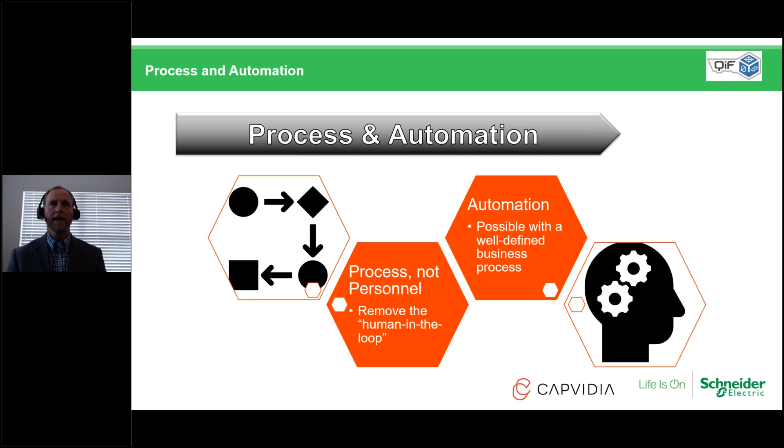And then once you have a more structured approach to your manufacturing processes or your business processes, then it becomes very easy to start automating certain tasks. And so that's a very big time saver, obviously. And so that's the flow from design down through measurement.

The second benefit that comes: a lot of the benefits in terms of process and automation are some of the things that you see first. But I think the bigger benefit is going to come in terms of data capture and using the data from your real parts and feeding that data back into design. If you think about metrology now, by and large, it's used to make pass and fail decisions. There's a lot of effort put into gathering data about the actual parts that are created.

And really, to a large extent, it's being wasted. And often for this reason, metrology or quality is not really viewed as a value-added activity in manufacturing. It's kind of a necessary evil that you have to spend some money on, but it's not viewed as something that provides value. But the future state with model-based definition is very different.

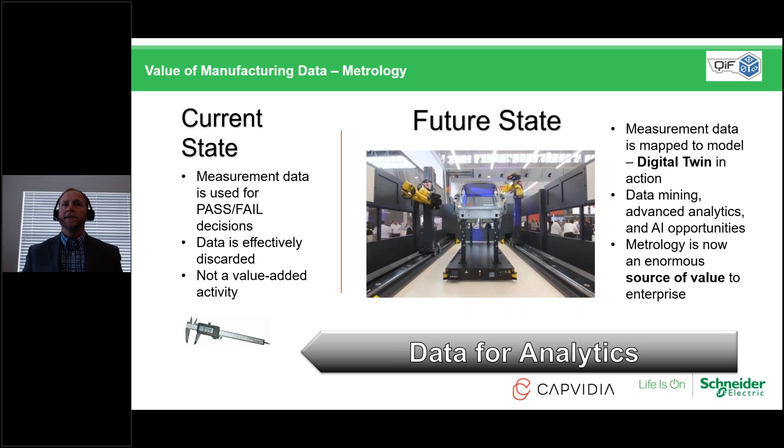We're capturing mountains and mountains of data related to our actual part. So let's use that data to add value to our enterprise. In reality, this is really what a lot of the talk about digital twin is. We have our design model, and then we have our actual models, and creating mappings between them. And in terms of the underpinnings of how you do that, a lot of it's with model-based definition. So those are kind of the streams that we see in terms of why model-based definition is important.

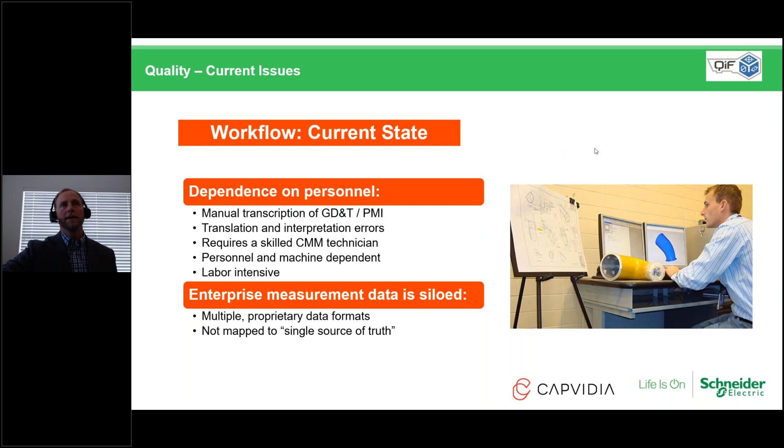And then on the other side, in terms of data collection, this can be a problem as well, because once you have somebody manually interpreting this drawing and entering it into the CMM software, you lose your chain of traceability back to your design model. So now your data is not mapped back to that single source of truth, which might be your NX model or your Creo model or your CATIA model or your SolidWorks model or whatever it might be. So that's kind of the state of quality-related MBD at this point. And this is what the MBD approach tries to fix and turn on its head.

First of all, it's just improvements in terms of the process. Transcription errors are eliminated because now we have PMI being imported by software and loaded directly instead of having to be interpreted by a person. The design knowledge that's encoded into your native model in the form of PMI is really encoded and then read by software, rather than something that we're dependent on different personnel to try to interpret.

So that means it's very repeatable. For the same PMI that you input, you get the same exact program every time. So that's a key thing right there for manufacturing. And then finally, it frees up a lot of time from these skilled metrology engineers to be doing things that are more value-added activities rather than just entering data from a 2D PDF.

And then finally, in terms of the availability of data, using QIF and using model-based definition allows you to maintain the link from your native model, your design authority model, to your QIF derivative and then through your QIF results. So you can keep that chain of traceability the whole way and keep a mapping: I have this PMI, this position annotation on my native model. I would like to know what all of the results are from all the measurements on all my various components for that specific position tolerance. Maintaining a mapping like that becomes possible, and that opens up a whole other world in terms of analytics.

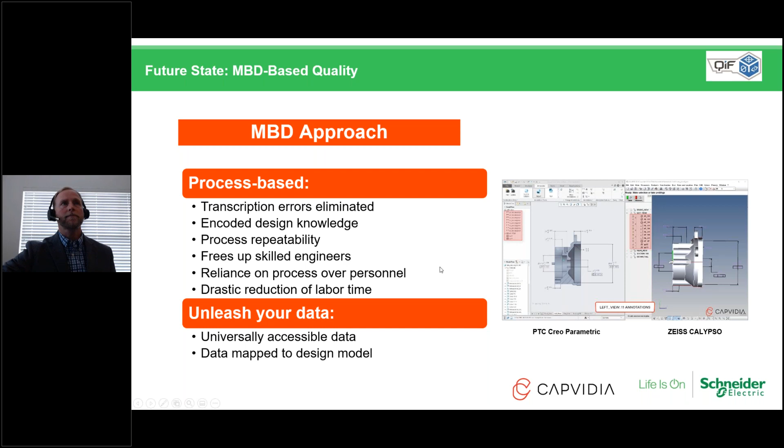So just to give a general idea of a very standard, high-level picture of a common workflow that a lot of users are using in terms of model-based definition right now using QIF, let's walk through these stages. We'll start off with our native CAD. In this image we're looking at a Creo Parametric model; maybe it'd be an NX model, an Inventor model, CATIA, and so forth.

So first, from this model we'd create a derivative model in the QIF format. And so now you have a QIF MBD model. This contains all your CAD data, all your semantic PMI, and it's in the ISO QIF format. So it's an international standard, easily understood and readable by third-party software.

From here, one of the big things that a lot of people are doing is carrying out this task called ballooning, often called ballooning or bubbling the part. Basically, at this stage we add characteristic IDs to each of the measurands that need to be measured on this particular part. And they can get listed out in a tabular form, like we see down here. This allows us to start to generate our control plan and determine what measurement devices will be used to measure and verify each of these characteristics on the model.

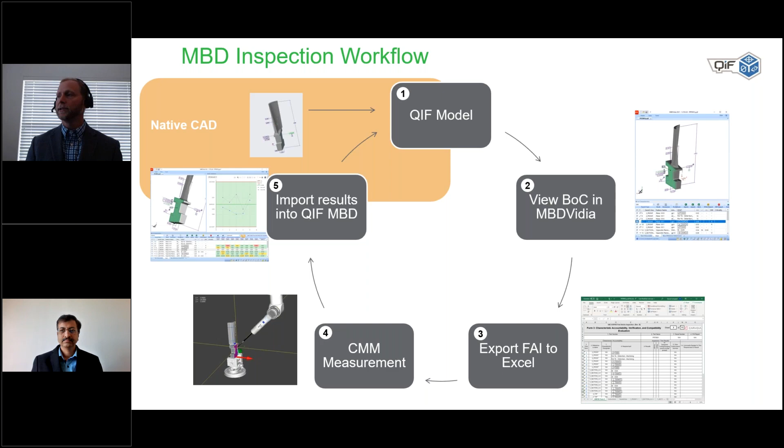And finally, once we're done, we can capture all of these results, whether they be from the Excel form or from a CMM measurement, and they would be exported to the QIF results format, which can be linked up and mapped back to the QIF model. So we would see here our blade model, and then a set of results coming in, some run charts and so forth. So that's a high-level summary of a QIF workflow using MBD. At this point, I'm going to pass it over to Narendra, and he'll give a more specific look at how Schneider is using QIF and has molded it to their workflows.

Okay, so thank you, Daniel, for that information. For the first part of what Daniel mentioned, I will give the Schneider perspective. So hello everyone, my name is Narendra Khadkar. I'm from Schneider Electric. So what is Schneider Electric? Let me go to the next slide.

Okay. So Schneider Electric is a technology company. We provide the solutions for automation, and we are in energy efficiency and sustainability. We provide solutions to different businesses, and if you see, we are in the market of buildings, data centers, industry, and infrastructure. So we have a strong commitment to innovation. So you can see the figures around.

We are a 25 billion company, and we have more than 128,000 employees across the globe. We have 4 key centers, that is North America, China, West Europe, and rest of the world. And we have mainly two businesses: industrial automation and energy management.

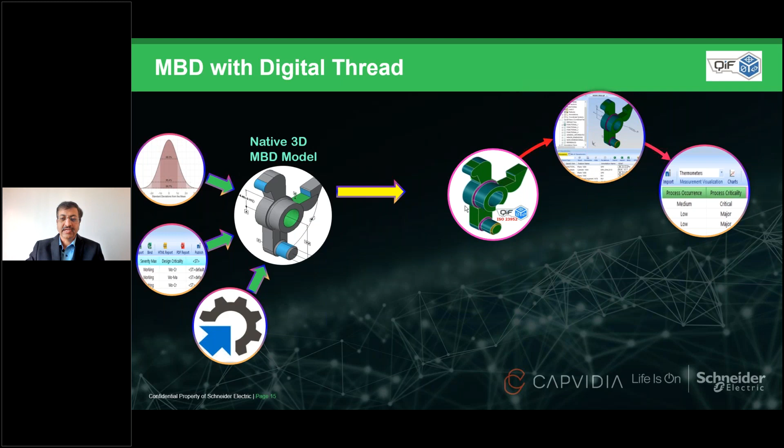the parts are manufactured. So in Schneider, maybe 5% of the parts are manufactured within Schneider, which are very key and confidential, but 95% of the parts are manufactured with our suppliers. So we need to onboard suppliers also. So whatever solution we try to bring up must be accepted by our suppliers, and they must play a key role on that.

So once the parts are manufactured, then, as Daniel was mentioning, we program the CMM offline program, or we can say the model-based CMM program, so that the parts measured at the supplier with the same program can be used at our facilities, so there is no confusion of selecting the points or the point cloud. So we have a consistency of measurement, and there is no ambiguity about what happens at the supplier's end or at Schneider's end. So there is a good consistency of the results.

And once the part is qualified, or if it's not good, then rework can be done at the supplier's place. And now, thanks to the 3D viewer that is available with the MBDVidia, we can see the result by just clicking on the key characteristics or the surface feature. Immediately the pop-up window or the results can be seen, like the thermometers, what are the real measurements, or we can see the process capability or process capability index, standard deviation, all the information is available. So this is the workflow that we customized that suits our robust design methodology.

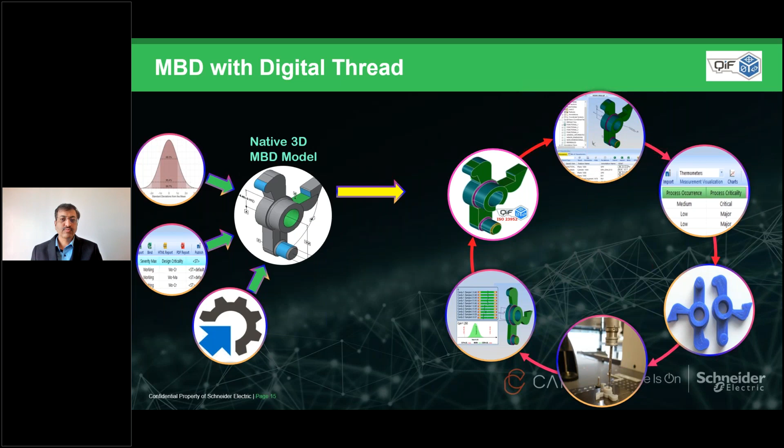So just moving forward, I have a quick demo to show you how the tool chain is seamlessly connected. So we start with model-based definition in Creo. Then you can see that the next phase for us is the CETOL. We use the 3D tolerance analysis tool, which has a direct link to Creo. So it's synchronized, and the bidirectional flow of the key characteristics can be pushed back to Creo also. So we maintain the digital thread along that. So if I just go quickly on to the video, it will be pretty fast. Okay, so this is what I just mentioned to you.

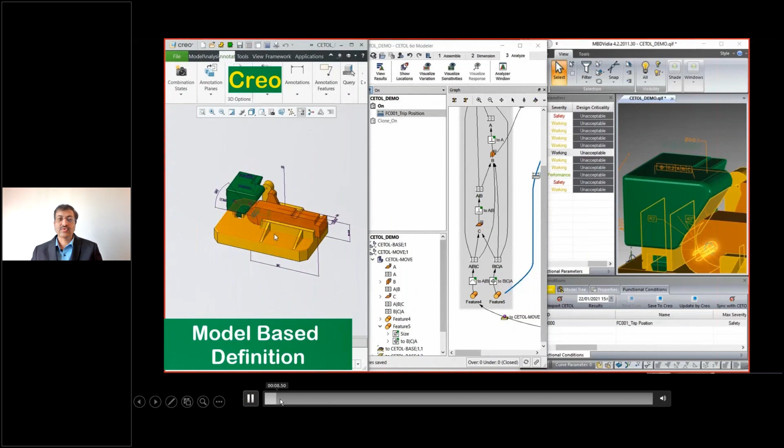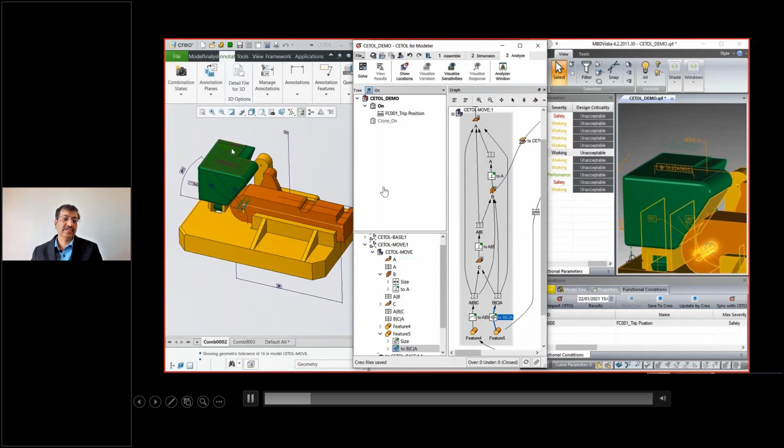Yeah, and then as I mentioned, we do the 3D tolerance analysis. So we get the information here, what are the optimized GD&T we need, and we can push all the information back into Creo, so that we can enrich the 3D native file. So apart from CETOL or the 3D tolerance analysis, we have developed an interface which manages the parameters. When we say parameters, it's all the key characteristics that define some kind of output for the product. We call it a functional condition.

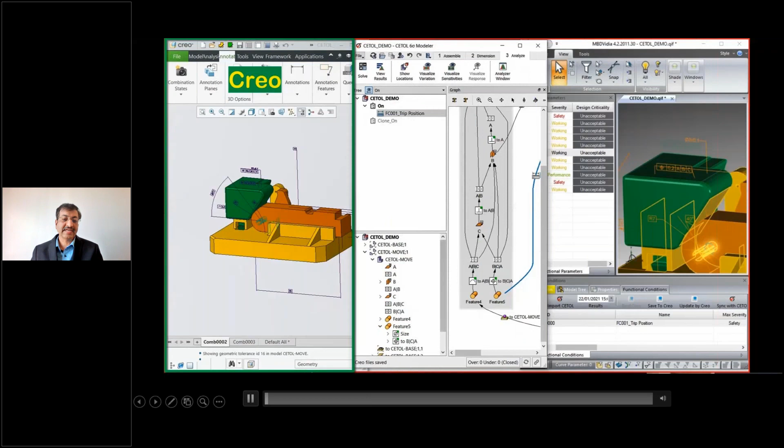So imagine that we have a trip function. If you have seen at your house, we have an MCB, miniature circuit breaker, and when there is a short circuit or overload, it will trip the circuit. So we have identified the trip position as the key characteristic, as a functional condition, and we know how many parts are involved, and what key characteristics are involved, like GD&T, perpendicularity, whatever. And then we manage that in another interface that we call a parameter manager. Once that is done, we know the criticality, we know the severity, and we can find out the CPK to qualify that key characteristic, or process capability, in other words.

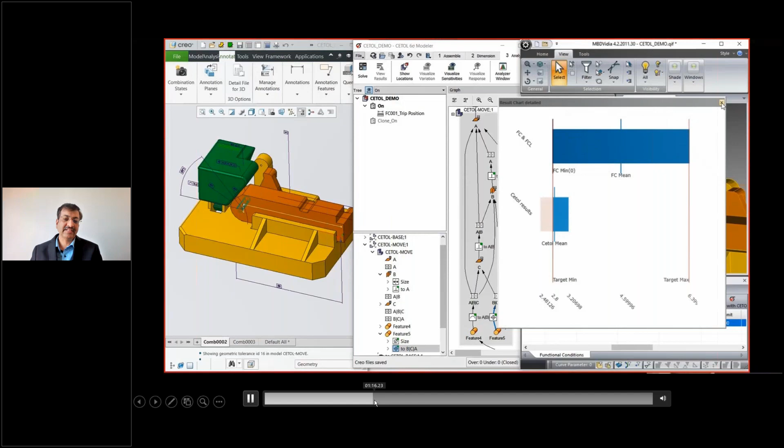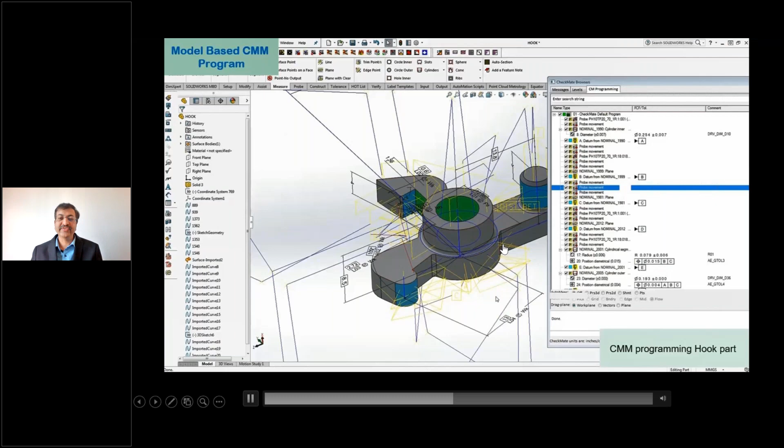So once done, until now the flow chain is seamlessly connected, so we can push the information front and back. It is not a problem. Once that phase is passed, we take that MBD model, which is now an enriched MBD model, and we can go downstream for the model-based CMM program. So we call it model-based CMM programming, or an offline CMM program directly from the model. You can see here, the program can be ready within minutes, so it takes hardly 2 minutes for this simple part, but we tested on a couple of parts, so it could take maybe 5 minutes maximum, and we save a lot of time. So it's a real productivity gain from the CMM programming itself.

Once that is done, we know that we have a point cloud. We can superimpose the point cloud, and we can go downstream. So here you can see the point cloud, which is unique, and then we can measure those points at the supplier's place or at Schneider or at any other facility, so they are transferable.

And then we come again back to the MBD tool, but it is another function that we call model-based component verification. It's kind of a plugin, you can say, within the environment itself. And here you can just click onto the surface or key characteristics. Then we immediately find out what is the process capability, long-term process capability or short-term process capability, what is the mean value, standard deviation. All the information is available at the fingertips. So it's pretty easy to take a decision directly here.

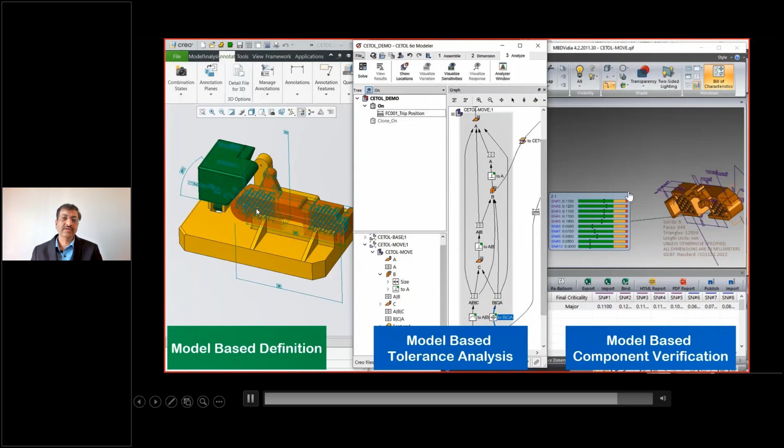So there are a few ways to collect the information. One of the ways that Daniel was mentioning is through the Excel import or export, but at Schneider we are trying to directly export the QIF file from the CMM measurement and import it directly into the MBD tool, so that we avoid the interface of Excel. But Excel is one additional opportunity that we do have. So based on the supplier's capability, we can use whatever way is suitable.

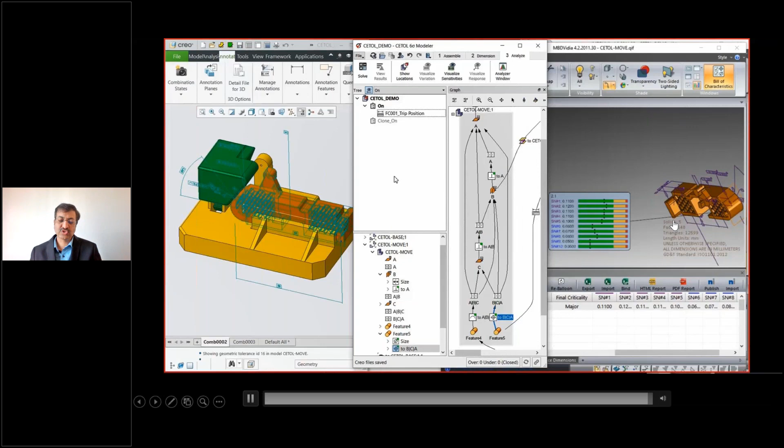So there are a couple of other capabilities, but the workflow that you are looking at on the screen is mostly for new parts. But we are working with CapVidia on another workflow that will answer the need of legacy parts, the parts that are already there, and how we manage those parts, because the models are already built. We are looking at another solution for that, so that we avoid the change management efforts.

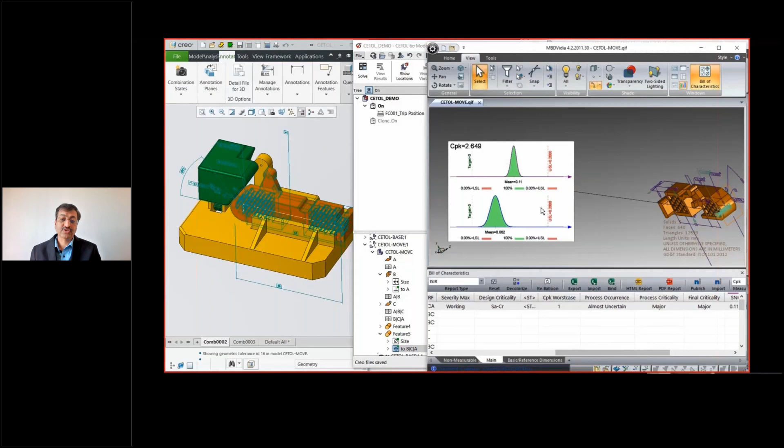So this is briefly about the pilots that we conducted last year. And again, we are also working with some of the suppliers to see how we can leverage from that, and what other capabilities suppliers are looking at, because QIF is relatively new for some of the suppliers, and we are continuously collaborating with them, trying to understand their point of view and their pain points as well.

So if I just move on to the next, I have some issue. Okay.